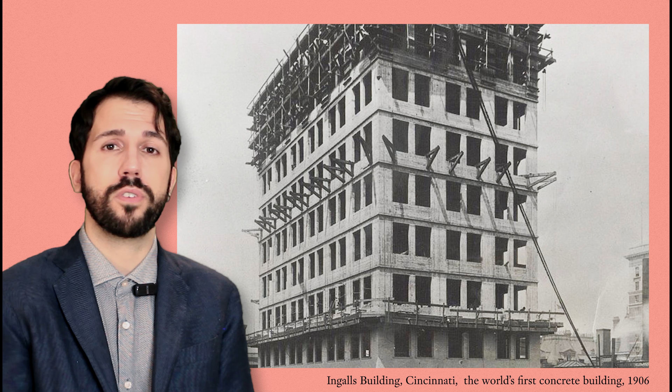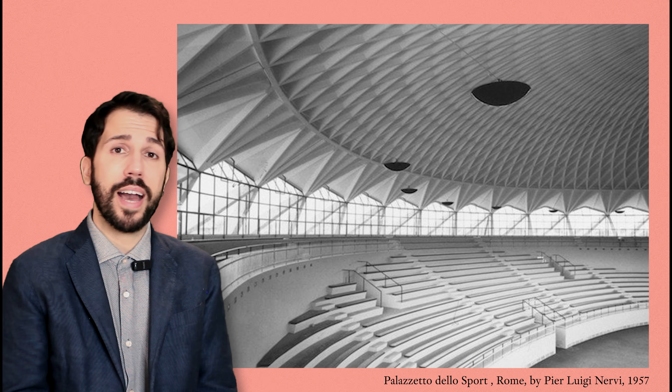After 200 years from its invention, we can now say that reinforced concrete has been considered a truly dazzling material. But its fantastic properties, I believe, created a frenzy that pushed professionals to overlook its drawbacks, and that still doesn't allow us today to rationally discuss the significant negative impact it has had on architecture. Reinforced concrete is a golden material indeed, but like King Midas in his myth, what he believed was the ultimate blessing ultimately became his curse.

The Industrial Revolution demanded stronger, faster, and more economical ways to build large infrastructure projects, but traditional materials had limitations, and the overwhelming and inescapable nature of progress in the Victorian era was not willing to compromise.

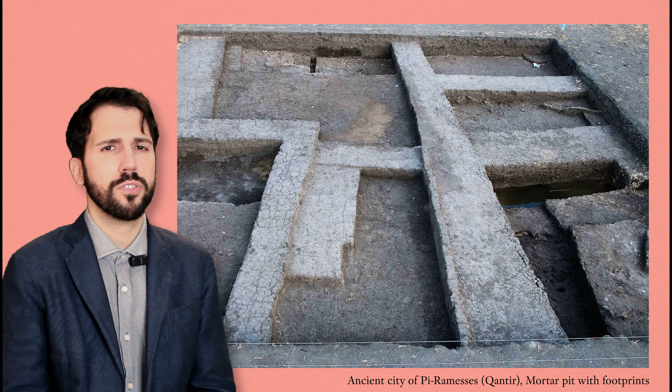Concrete is now ubiquitous, but it has actually been around for thousands of years. Concrete began as early mixtures of burned limestone, sand, and water used by ancient cultures such as the Nabateans, the Egyptians, and also the Chinese, who gradually discovered how hydraulic lime and pozzolanic materials could harden underwater. My fellow Romans then transformed these early recipes into a true concrete technology, using volcanic sands like the pozzolana.

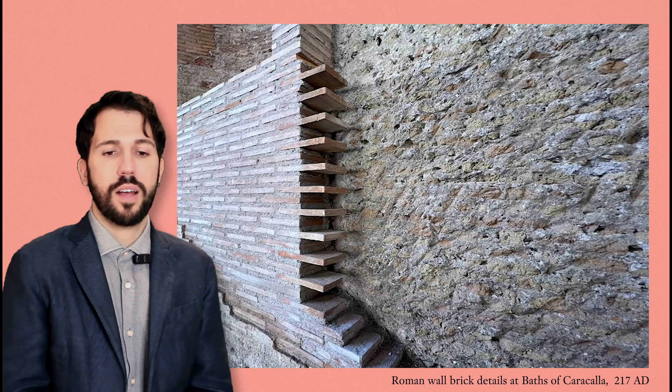And these enabled them to build durable structures like the Pantheon, a 43 meters high building built nearly 2000 years ago, that still stands today as the largest unreinforced concrete dome in existence. Pretty remarkable. However, these ancient materials have little resemblance to the one we pour today. We now know that Roman concrete, the opus caementicium, hardened through a chemical process between lime, volcanic ash, and seawater.

Following new excavations in Pompeii, archaeologists discovered a near-perfectly preserved concrete workshop, complete with dry, pre-mixed piles of materials and marks on the walls detailing the quantities. What more do you want?

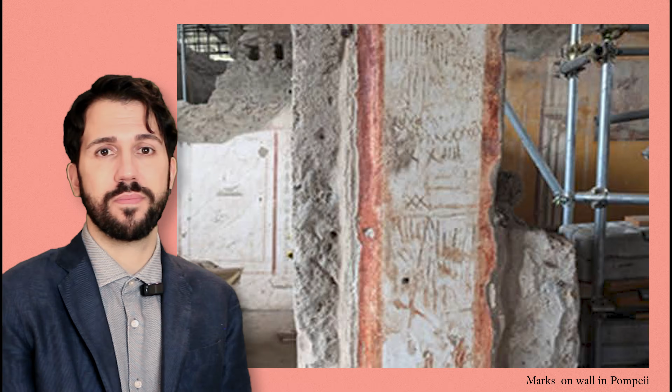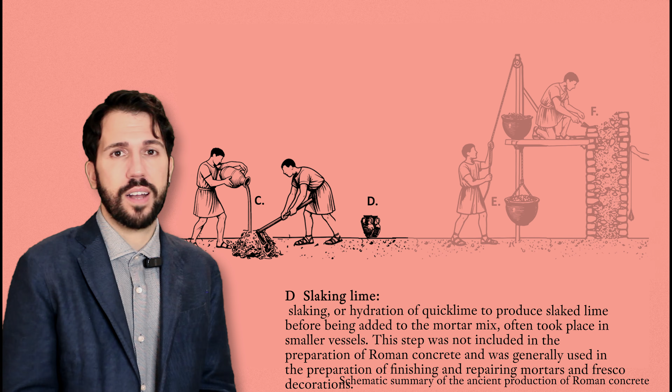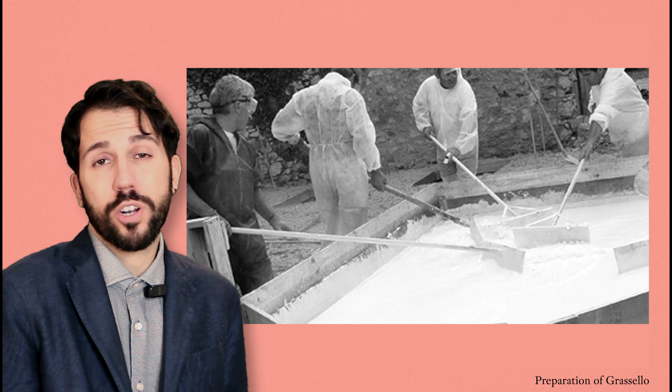Recent chemical analysis from MIT found that, contrary to what was previously believed, Romans used a hot mixing method involving quicklime, calcium oxide, which in Italy we call calce viva, live lime, an extremely caustic and unstable material. It seems instead that slaked lime, the hydrated lime, was used just for finishing mortars and plasters, where contact with skin would be unavoidable. This means that the chemical reaction would heat up part of the concrete as it set.

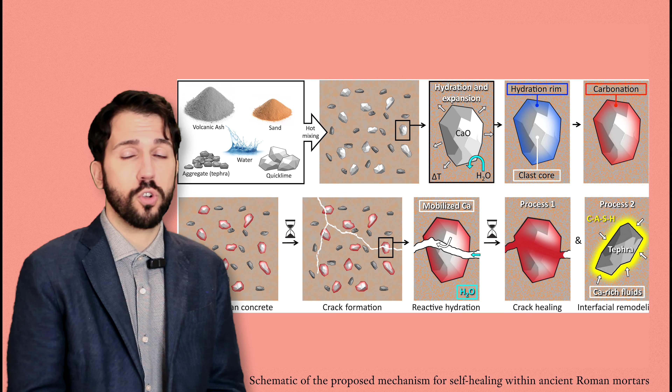Studies have found that this mixture grows stronger over time and also has some self-healing properties, where the fragments of lime, called clasts, that remain in the concrete after it sets, dissolve and recrystallize when wet, within the concrete's pores and cracks strengthening its microstructure.

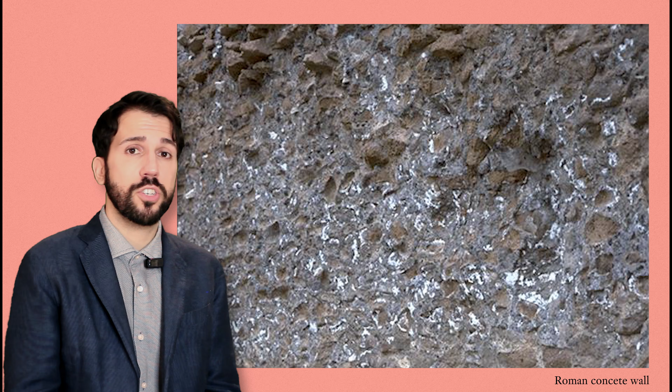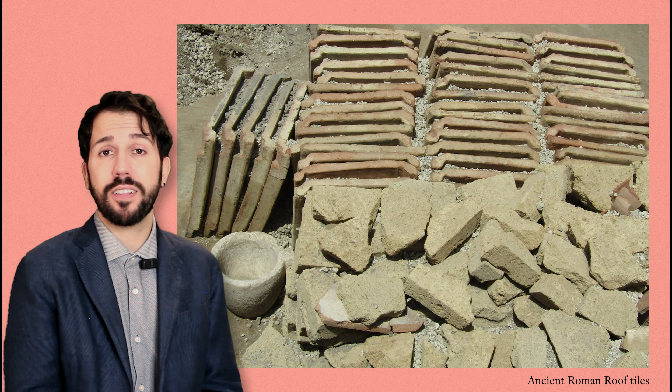Ancient Roman concrete extensively used local materials, and its exact composition varies significantly based on the resources available on the construction site. Roman engineers, in fact, adapted their recipes to different regional geological contexts, a practice also described by Vitruvius. For example, in regions where suitable volcanic ash was not naturally available, such as Britain and other non-volcanic areas, Romans adapted the formula by grinding down local materials like tiles or bricks and adding the powder to the mixture to achieve a similar binding effect.

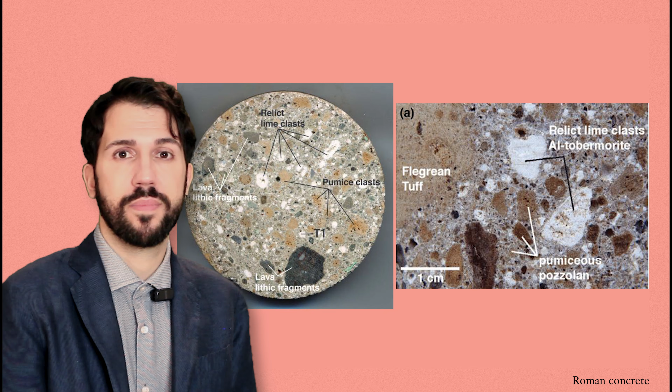They also perfected mixtures used in structures that required special properties. For example, in marine structures, like piers and harbors, Romans added seawater to the mixture, which they found reacted with the volcanic ash to form rare strengthening minerals, like the aluminium tobermorite, making the concrete stronger over time. They also invented a concrete with waterproofing properties, the opus signinum, which used small pieces of broken pot instead of other aggregates, used mostly for Roman baths, aqueducts, and cisterns.

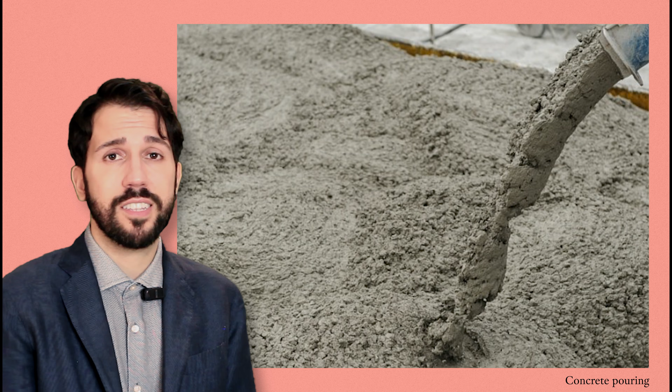Modern concrete instead is an entirely different invention. It relies on Portland cement, called Portland because its hardened form resembles the pale limestone quarried from the Isle of Portland here in England, and steel reinforcement, which became more available with the Industrial Revolution. A miraculous combination where two different materials compensate positively for each other's weaknesses. Traction and compression give an incredible performance that allowed concrete to become ubiquitous and architects and engineers to challenge common sense. But not all that glitters is gold.

Like Dorothy in The Wizard of Oz, we must start our journey finding the truth at the end of the road, and not blindly trust authority, but pull back the curtain to find the truth.

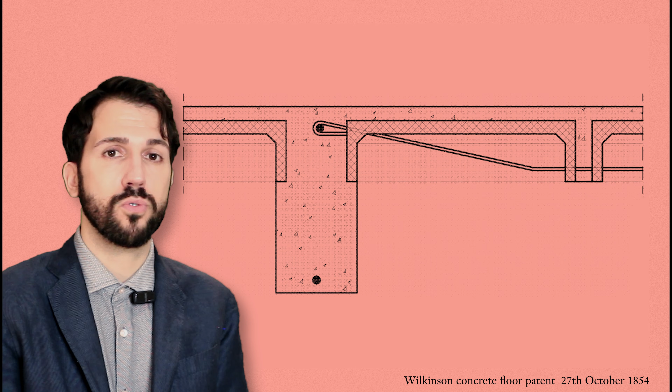Reinforced concrete was invented in 1854 by a plasterer from Newcastle called W.B. Wilkinson. Wilkinson inserted steel hoops into wet concrete to resist the tensile forces that cause concrete to crack under the load. From this humble origin, reinforced concrete would soon become the go-to material for rapid and economical construction.

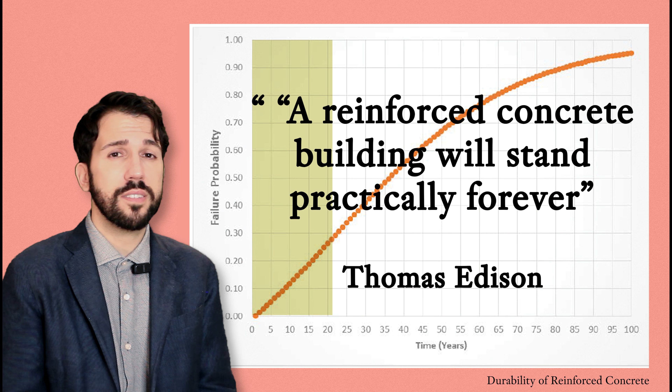But contrary to the structures of the ancients, modern concrete buildings are not designed for longevity. Studies show that the typical structure has a lifespan between 50 and 100 years. This is the estimated period during which the structure is expected to remain safe and functional, and assumes routine maintenance. This lifespan shortens significantly for structures exposed to salt, humidity, vibration, or physical and thermal stresses.

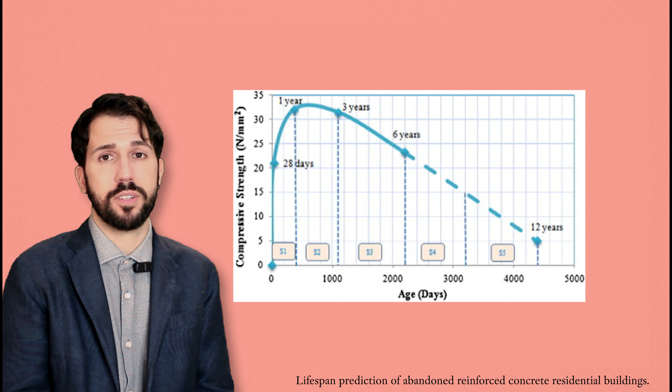Modern additives used to speed curing, because of course we can't wait 28 days for nature to do its thing, or to make the concrete less permeable or resistant to corrosion, etc., if not carefully designed and properly executed, can further shorten its durability and performance.

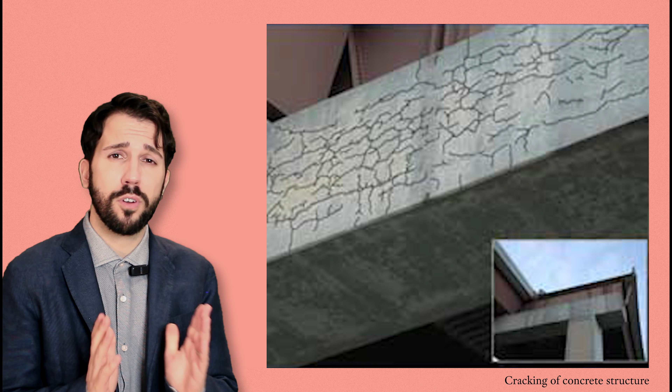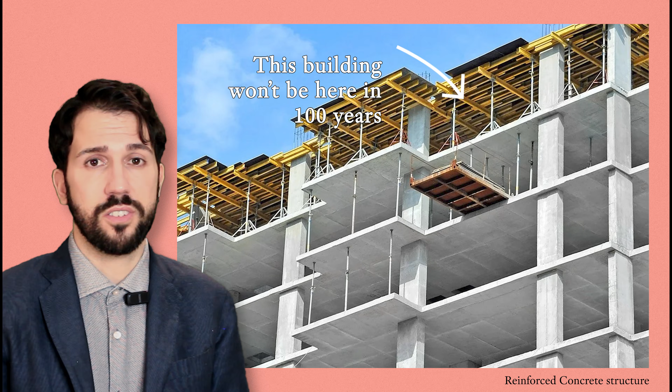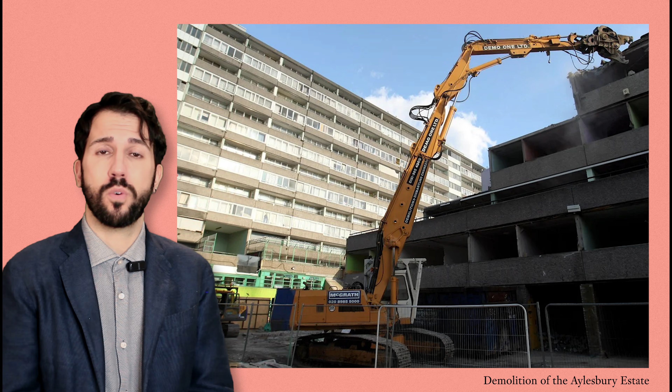And now maybe you might think, wait a minute, by the time I finish paying the mortgage for my flat, I might have to demolish it? Well, reinforced concrete structures are typically designed for a service life of 50 to 100 years. So this will probably be a problem for your kids or grandkids. But if you consider how the lease length affects the value of your home, imagine what this will do when your kids want to sell your old building. And we don't pay cheap for our buildings.

While plain concrete can literally last for centuries, modern reinforced concrete deteriorates much faster because the steel bar inside inevitably rusts, causing cracking, spalling, the so-called concrete cancer, and structural failure. And because concrete structures work as a system with a solid bond, parts can't easily be replaced.

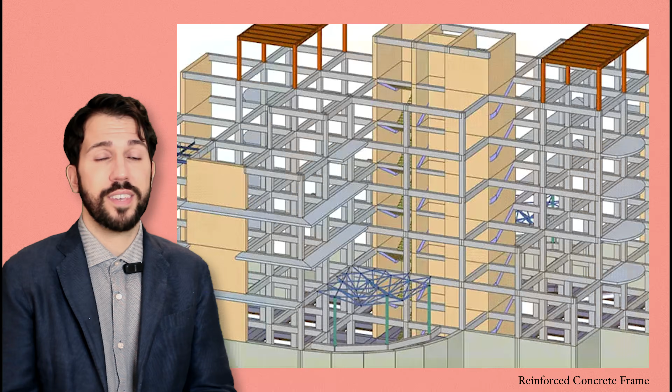Yes, there are corrosion mitigation technologies and alternative reinforcements, but they cannot solve the fundamental flaw of embedding the steel in the concrete. Our society must rethink its assumption about materials and go back to building structures that can endure far longer and avoid waste of material, money, risk to lives and health, as well as the continued erosion of our relationship with nature. But if you consider what we were capable of building using no magical material but only ingenuity, I'm pretty sure we'll be fine.

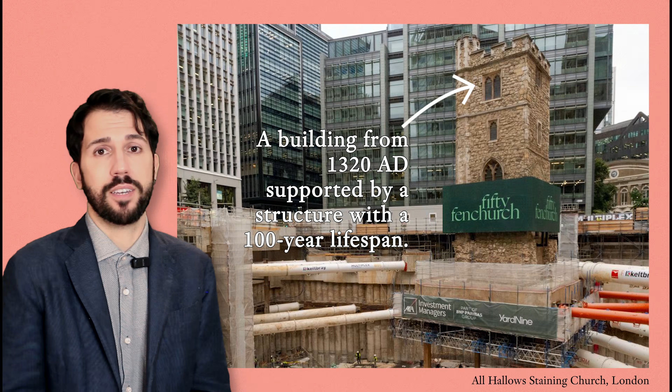If this fervor and ignorance were somewhat excusable at the end of the 19th century, now it has become a willing blind eye, a complacent system that puts quantity over quality, and is willing to ignore what we know while still allowing this material to be the backbone of our world. Highways, towers, stadiums, dams, ports, pipelines. Most of the built environment rests on reinforced concrete, relying on its magical performance even when it would not be required. Our modern cities, in effect, have all been constructed with an expiry date.

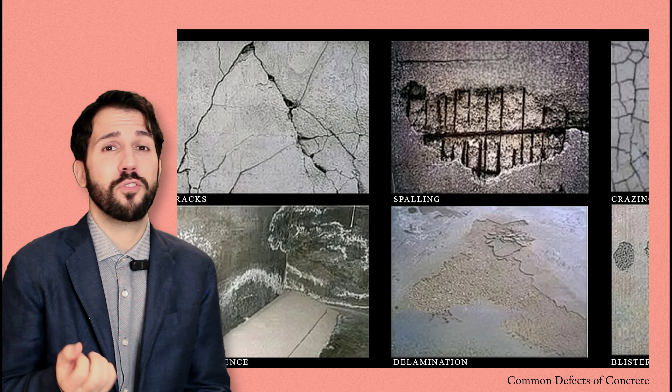As mentioned, the problem is straightforward. Concrete and steel, they love each other at the beginning, but want to divorce later. They age badly together. Steel corrodes, expands, and fractures the surrounding concrete. Carbonation reduces internal alkalinity. The moisture infiltration accelerates degradation. Temperature cycles open microcracks. Chemical reactions like alkali-silica reaction destabilize aggregates.

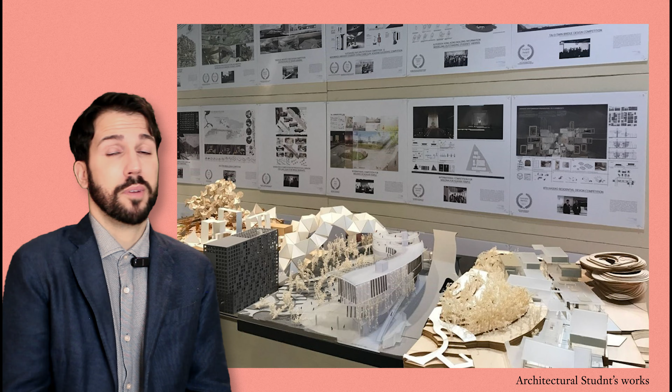But are architects taught this at university? From talking with colleagues, I often find that no, they're not aware of this itsy-bitsy problem below and above our heads. The worst part is that structural concrete is boxed behind walls or hidden from view, and this doesn't allow assessment of these failures, which accumulate quietly and invisibly.

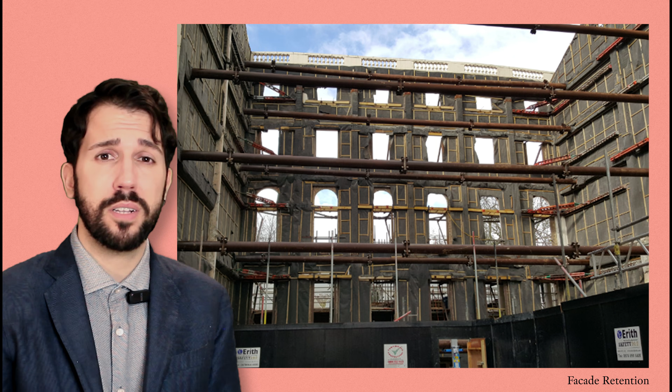And when so-called old buildings need to be renovated, more often than not, the most cost-effective and safe strategy is to gut the building and keep the facade, if of any relevance, or demolish it altogether. But even the new structures are in concrete, kicking the can again down the road for the next generation to solve. The global replacement bill will be measured in trillions, not millions. The next generation will inherit a crumbling urban fabric that must be dismantled and rebuilt completely. Hopefully they will be wiser and not build it in reinforced concrete.

We all must relearn restraint, humility and moderation, as another problem of reinforced concrete is that it has enabled ever larger structures, which again will pose a real problem very soon. Imagine this.

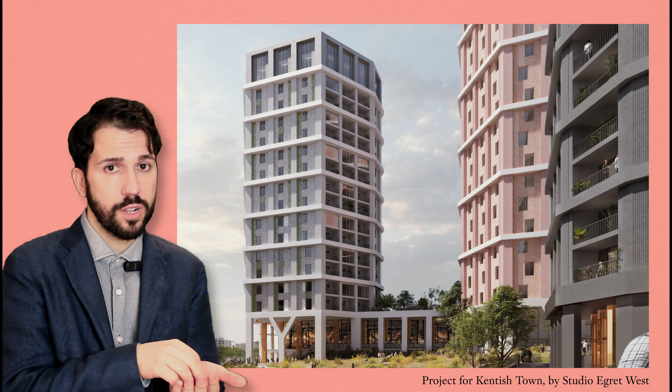Now developers take a site with a few homes and make a big tower. The current few people living in those little homes are relatively easy to ask to move, but when the tower must be replaced because it's in reinforced concrete and eventually its structure will fail, who is going to have the resources to displace all those people who bought flats in towers?

The longevity problems of concrete are huge, but only one side of the issue. The environmental footprint of concrete is severe and escalating. Concrete is the most used material in the world after water, with a global consumption of around 3 tons per person per year. Modern concrete production depends on sharp, angular sand from rivers and coastlines. Desert sand, rounded by the wind, is unusable.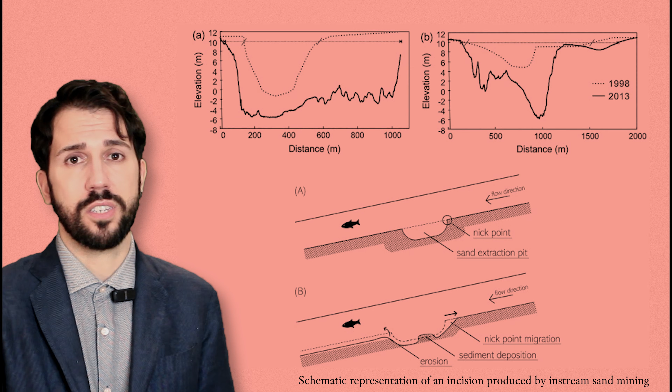The result is a global extraction at a scale that is destabilizing entire ecosystems. Riverbeds deepened, triggering erosion and flooding. Coastal environments stripped of protective sediments. Illegal sand mining linked to organized crime. Entire islands are disappearing in Southeast Asia. Sand is now the second most extracted resource on Earth after water.

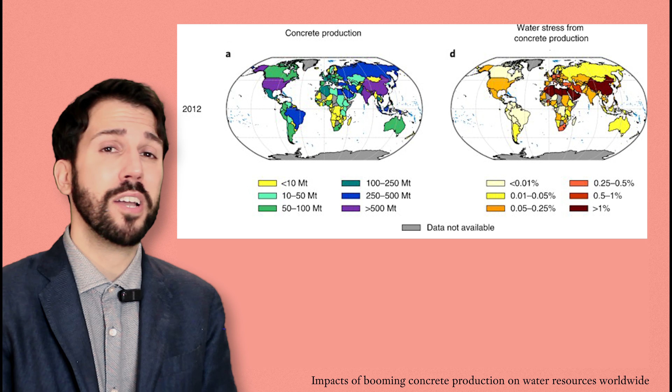Cities are literally built on the destruction not just of the nature they replace on site, but also of distant landscapes. As you know, producing concrete is also water intensive. 1 ton of material can consume up to 300 liters of fresh water. Imagine what this entails for arid regions that have been building like crazy for decades.

To mask and diffuse facts, the industry now promotes green concrete. Concrete production is in fact a major source of global CO2 emissions. The term green concrete often refers to minor improvements such as using waste materials as components, like fly ash or slag, or incorporating captured CO2 during the mixing process, which only marginally reduces the overall impact of a fundamentally high-polluting industry.

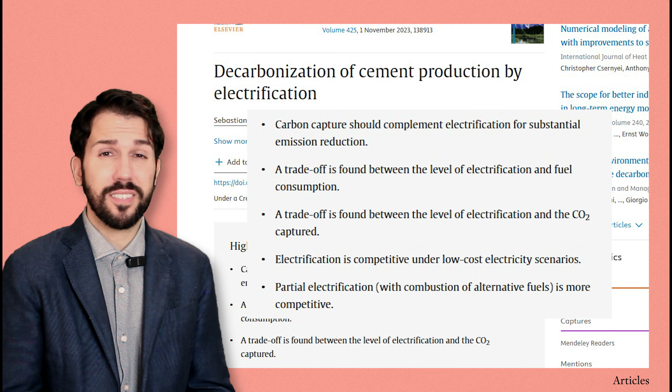The industry is exploring various technologies to electrify cement production, but this is very difficult and poses several challenges, especially the high temperatures required for the calcination and the need for efficient heat distribution. But in my opinion, the main issues explored so far will still remain intact even if it's completely electrified. Though I guess every little helps, but knowing modern humans, this will become the excuse not to face the other challenges and to keep business as usual.

The material is not being reinvented, but its public image is. As with everything in modern culture, all is narrative and very little is substantial.

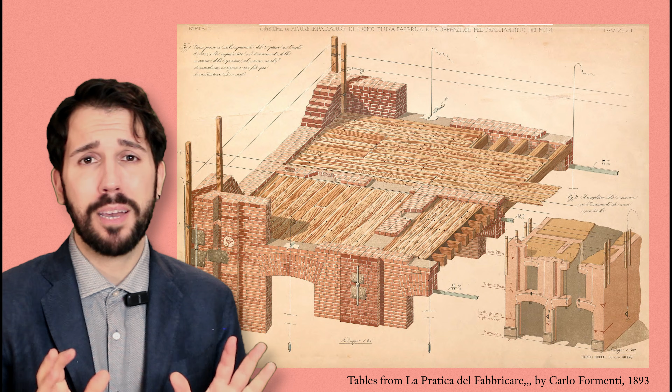The good news is that if longevity and ecological responsibility matter, as they should, the alternatives to concrete already exist, not in new expensive high-tech materials, but in traditional methods of construction, which we blindly abandoned to express our ego and make more profit. Stone, brick, timber, and earth-based construction can all have a place in our cities, and they can help us make them more resilient.

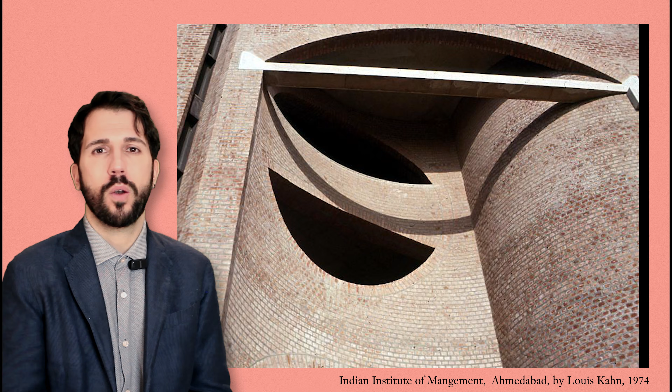They have characteristics that reinforced concrete cannot replicate. They are repairable, they age predictably, they can last centuries, they use minimal energy to produce and can be local, and leave no toxic legacy. But this will only work if designers are sensible and don't ask them to build the impossible. We must once more learn from the material and ask, as Louis Kahn did, what do you want to be? And work with it, not against it.

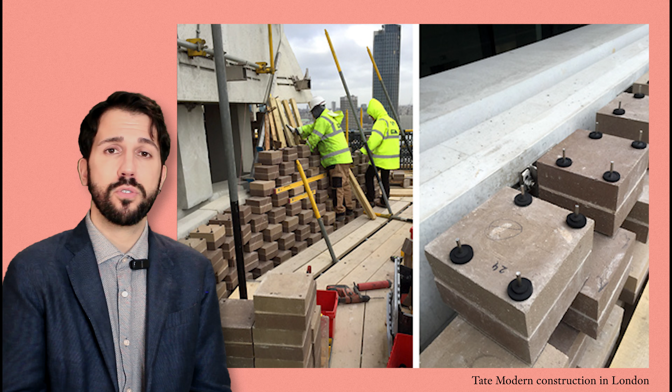We must accept reality. Modern methods of construction really are inefficient. If you scrutinize them, they all require over-engineering, and even materials that could support themselves are all hung. If we want resilient cities easy to maintain and sustain, with human densities that allow localized intervention and don't strain the infrastructure, we must stop pretending that reinforced concrete can be dressed up as sustainable.

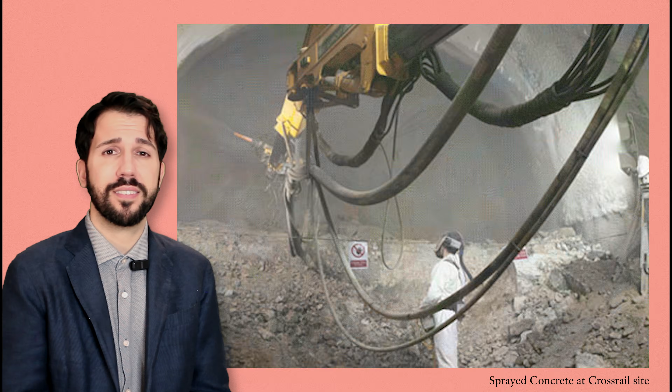In my opinion, the path forward lies not in marginal technological tweaks, but in rediscovering material systems that work with time and are not ticking bombs.